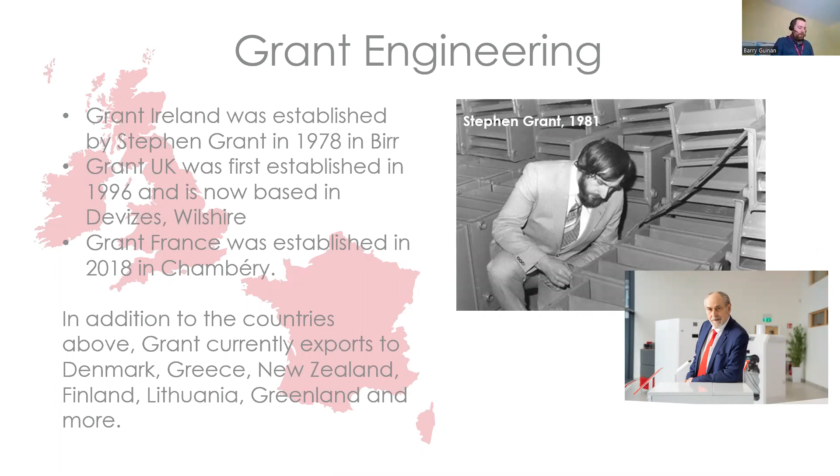Right, so basically, what is heat loss? In its simplest terms, heat loss is a measure of the total heat transfer through a building from internal to external via either conduction, convection, radiation, or a combination of them. Heat flows from hot areas to cold areas. This is derived from the second law of thermodynamics. So it will always flow from hot to cold.

Most homes will be maintained at around 20 degrees approximately. The average air temperature externally will be well below this. So this leads to a change in temperature, which means that you're going to have heat transfer from inside to outside. Heat transfer or heat loss will be measured in watts, or more commonly kilowatts, and in the older terminology, BTUs, which are British thermal units.

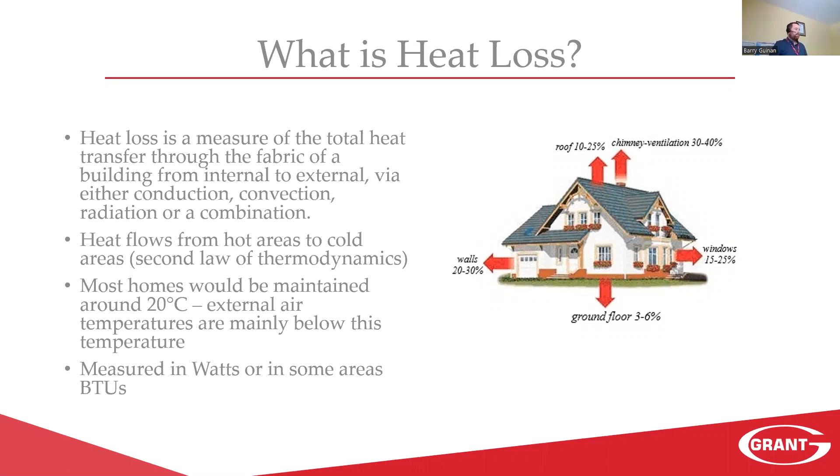So the first part of heat loss will be fabric heat loss. Fabric heat loss is the amount of heat loss through the physical elements of the building, such as the walls, ceiling, floors, windows, etc. To calculate fabric heat loss you need to know the internal design temperature. We need to know the external design temperature. We need to know the surface area of the specific element, so maybe the window, the wall, the floor, and then we also need to know the U value of the element.

When designing a building or a retrofit from a heating perspective, the element areas are generally set by the homeowner's requirements or by the existing building. So the wall is already built, the window ope is already built. The temperature difference between indoor and outdoor will be set by the climate. So the only real value that can be adjusted from a design perspective is the U value. So we can increase the insulation, or the quality of the window, etc. So from a fabric point of view, to minimize the heat loss, we must minimize the U value.

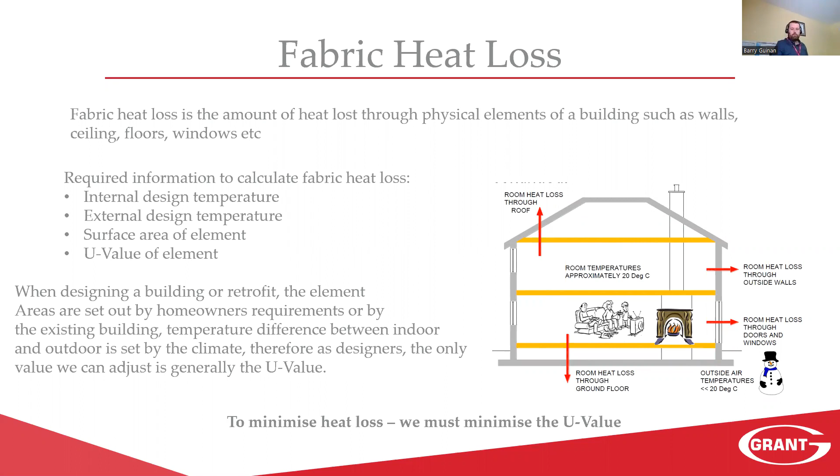To calculate the fabric heat loss, the simplified calculation can be given as Q = U A ΔT. So Q, the actual heat loss of that element, is the U value of the element times the surface area of that element times the temperature difference between indoor and outdoor. The overall heat loss of the building fabric would be the sum across all the different elements and the different temperature changes.

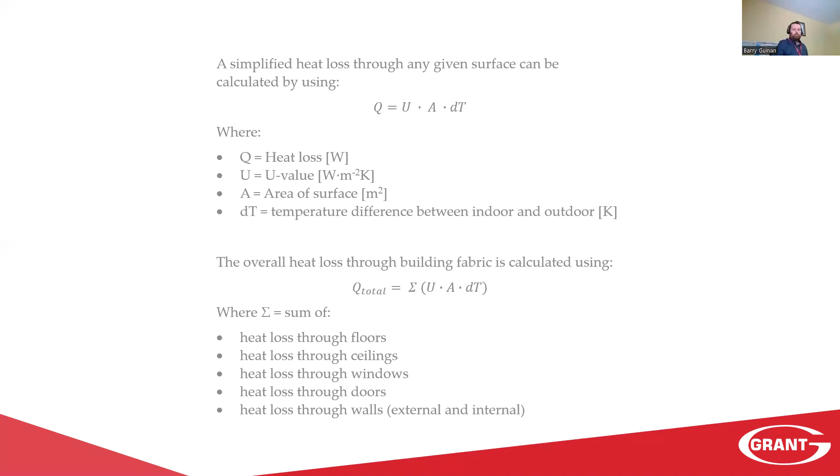The second part when calculating heat loss is ventilation heat loss. There's two primary causes of this: ventilation and infiltration. So the movement of the heated air within a space, transferring from inside to outside, lost to the surroundings, and then being replenished with cold air.

Ventilation is the deliberate process of replacing air in any space to provide high indoor air quality, whereas infiltration is the uncontrolled ingress and egress of air into any space through air leakage points. Air infiltration provides a significant amount of heat loss from a building. So in order to reduce this, we need to increase the level of air tightness.

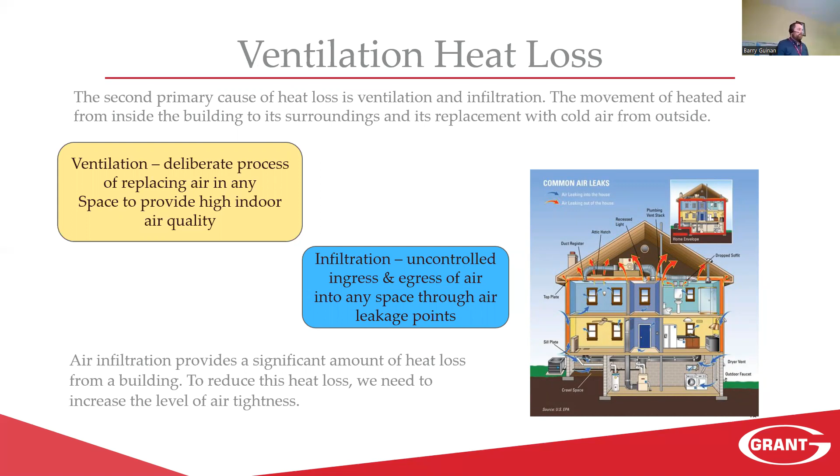The CIBSE Heating Design Guide and the standards we would use in Ireland, NSAI SR 50-1 and SR 50-4, which relate to plumbing and heating and heat pumps. So when we are designing heat loss calculations, there are a number of set criteria. These will be internal design temperatures for different rooms. So each room would have a specific target based on comfort levels, which are required to be reached.

They would also then have a specified air change rate. So this would be the volume of air that's required to be changed within that room over a certain period. So if you can see here, this is an example table from SR 50-1. It would have a list of different rooms. So, for argument's sake, a living room would have a design temperature of 21 degrees.

A new build would then need 0.5 air changes. Or if it was an older building, you would be looking at 1.5 air changes. So once we get to the calculations, we'll see the difference this makes. It can have a very significant difference. These, I suppose, are standard simplistic values. These can be adjusted once we factor in ventilation.

So if we had heat recovery ventilation, for argument's sake, the ventilation heat loss is possibly reduced because we can recover the heat that's been replenished back into the room. But for basic, simple terms, we're just going to keep it at these values. Secondly, if there are chimneys or flues or permanent vents within rooms, then the ventilation rates would obviously have to be increased to account for these.

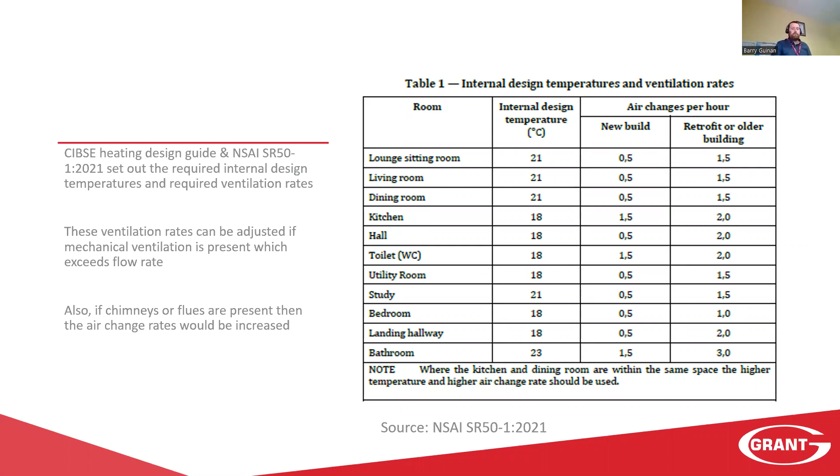So the ventilation heat loss calculation would be Q = 0.33 × V × N × ΔT. Q being the heat loss, 0.33 being a combination factor of the density of air and its specific heat capacity, V being the volume of the room, N being the number of specified air changes for that room, and ΔT being the temperature difference between indoor and outdoor.

So if we combine our previous calculation for fabric loss with our ventilation loss, the total heat loss is given by the sum of the elemental area times the U value, plus 0.33 by the volume by the air change, all by the temperature difference between indoor and outdoor.

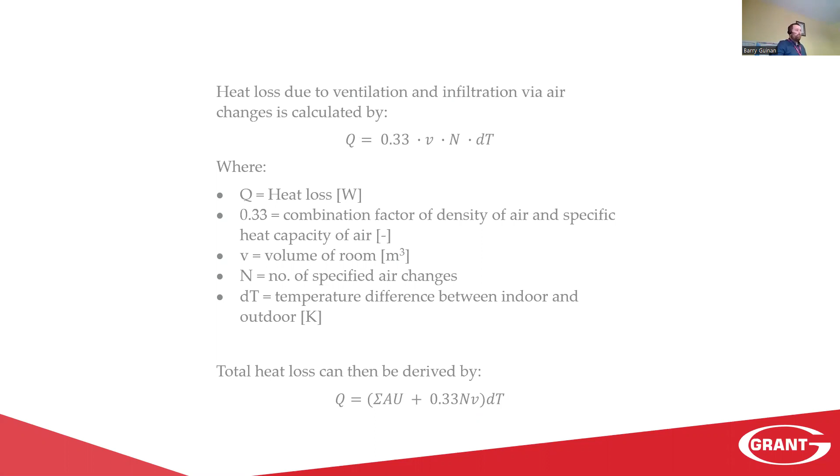So once we move on to a heat loss calculation, what we need to factor in is that if we're taking standard residential premises, each room has to be treated as separate. This is because each room has a specific set of design criteria. It would have its own design temperature and its own specific air rate. So we need to treat each room as specific, and then we can sum them at the end.

And I suppose the most important thing is that heat transfer will only take place when there is a change in temperature. So when we're doing internal calculations, if there is no change in temperature, for argument's sake, two bedrooms side by side both designed to 18 degrees, the internal wall between them will have no temperature change across it, so there'll be no heat transfer. This also occurs with intermediate floors and anywhere else with the same temperature on adjacent sides.

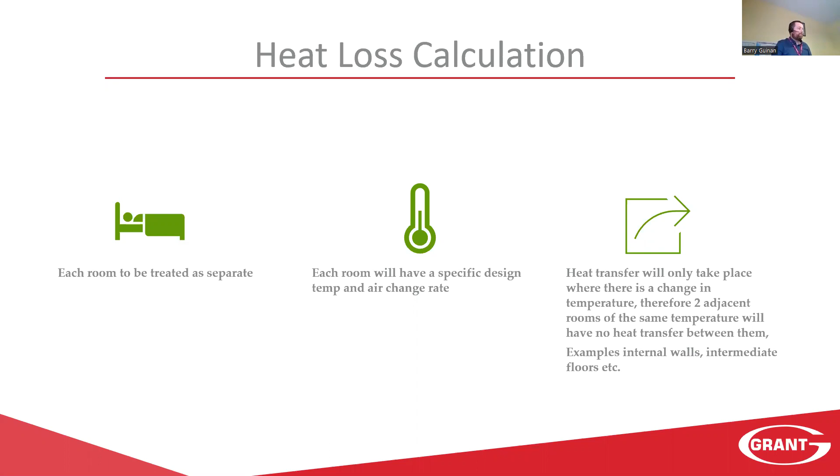So there are many different methods of doing heat loss calculations, different procedures and so on. This here is an example from SEAI's website. SEAI have a sample workbook on their website, which can be downloaded to aid people completing heat loss calculations. It's free to download for anyone, so it makes it easy starting off. You can see what's involved.

So factoring in what we've said about the different types, if we start at the top, you'd have your room specifics. This would be the actual type of room it is, whether it be a kitchen, a bedroom, a bathroom. Then it would have its corresponding design temperature and external design temperature.

In Ireland, we generally would take a design external temperature of -3 degrees. We can generally take this for the whole island. If you were doing heat loss calculations in the UK, up in say Scotland, you would possibly use -7, whereas down south of England, you might be using 0.1 or 0. So the external design temperature generally can change, but for Ireland, we would usually keep it at -3, so we keep it as a constant.

The next section then, if we look at the actual ventilation heat loss, you can see here we'd have the number of air changes per hour. This would have come from the table. So for our specific room, we need 1.5 air changes. Then the next part of that equation was the V, the volume. So we have the length by the width by the height, the volume of the room. So the amount of air to be heated in the room will be your air change multiplied by the volume of the room.

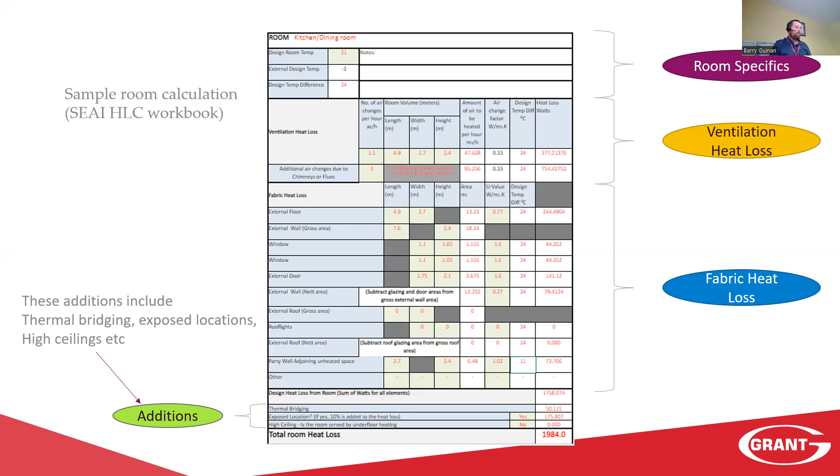So to summarize really on the heat loss side of things, to perform a heat loss calculation, the bare minimum that is required is we need to know all the room dimensions of the specific property. We need to know the window sizes, floor areas, ceiling heights, internal walls, external walls, we need to know all about the doors. So you need to know all the different elemental areas of the building.

We need to know the design room temperatures. So we need to know what the rooms are. If you had just a plan, but there was no way of identifying what the rooms are, you could have rooms designed at different temperatures that are incorrect. So like a bedroom being at 18 and a bathroom possibly 22. So you need to know exactly what the room is and what the design temperature is you're trying to get to.

We need to know the external design temperature, in Ireland being -3. We need to know the U values of all the different elements. And then we also need to know the air change rates. So once we have these bits of information, we should be able to perform a detailed heat loss calculation.

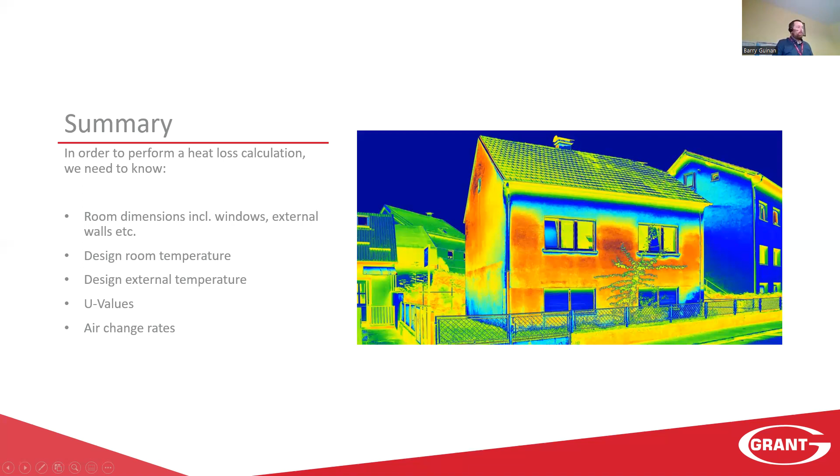Next, we'll just have a very quick overview of DEAP software. DEAP software, or Dwelling Energy Assessment Procedure, is used by BER assessors to calculate the energy performance and carbon dioxide emissions of a home's space heating, water heating, ventilation, lighting, etc. It is a web-based software, and is used to calculate annual delivered energy consumption, primary energy consumption, and the carbon dioxide emissions.

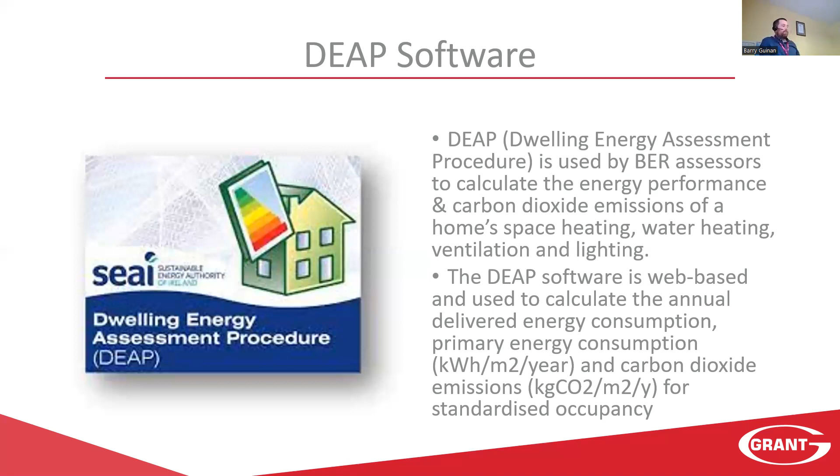Effectively, any BER assessment or technical assessment that's done on a residential basis will be done using this software package. Here are just some examples of what some of the screens look like, and what data goes in. It is a fairly significant process, so everything to do with a building will be inputted. So you would have all the elemental areas, window sizes, what orientation they're at. You would have everything to do with it.

So we see here, you'd input data for the floors, so number of floors, how many stories, are they heat loss floors, U values, exposed perimeters, etc. This would be the same for the roofs, walls, rooms, doors, etc. So basically everything from an elemental point of view of a specific building will go in.

You would also have all the ventilation details, so infiltration, your structural air tightness, ventilation methods, so is it natural ventilation, is there mechanical ventilation, heat recovery, etc. Number of sides sheltered. You would have the lighting, so how energy efficient is the lighting going into the building.

You would have the proposed or the existing heating system that's been installed, so is it a heat pump? What are the controls and responsiveness, pumps and fans? Basically everything to do with the mechanical side of the system. So from pumps to stats, to the amount of actuators, everything would go in.

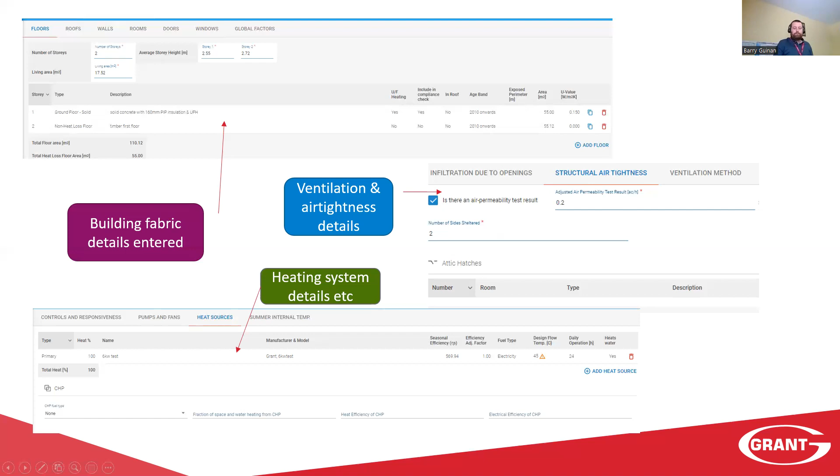So once all the different information is inputted and all the different tabs are filled out, you will get your results. It will tell you if all the different elements are compliant with the different targets, and what your energy rating is going to be. It would have all the different values and results from the building, from a carbon, from an energy, and possibly on a new build from a renewable basis.

For people on a retrofit scenario, if they're going for a heat pump grant, or if they are getting deep retrofits or shallow retrofits, they would need to know the HLI, so the heat loss indicator of the building. So this is the software that will produce that target. So we can see here, this example is 1.1, the target being 2 or 2.3 cost optimal. So you need to be below them. So this is what it'll tell you.

Also on a new build, it will tell you if you're compliant with building regulations. And then you would have your 3 targets, your energy target, your carbon target, and your renewable target. So the software will provide you with information to say, yes, the house is compliant, or no, it's not. If it is not, then you can go back and adjust certain parts to see what needs to be done.

If insulation in the wall needed to be upgraded from maybe 100 mil slab to 150 mil slab, or if the design flow temperature of a heat pump needed to be reduced from 45 to 40 if possible. So the software will tell you everything you need to know, and it will provide a pathway to get a house either compliant as a new build or, on a retrofit, how to achieve the targets and what measures can be adjusted in order to reach the targets.

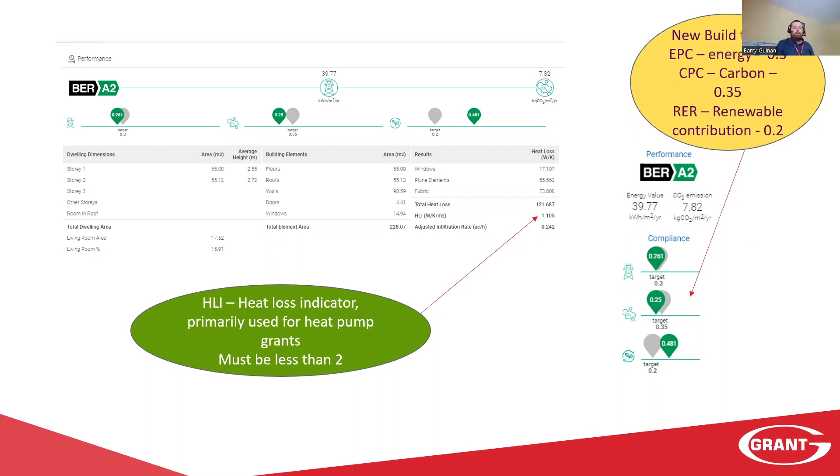I suppose that's really it for the overview of heat loss and DEAP software. There's a lot more to it, but without getting too technical with it, just to give you an overview, that was it.

For anyone that is interested in heat loss calculations or what goes into it, I would recommend the CIBSE Heating Design Guide. It gives step-by-step how to do a heat loss calculation, what's involved, what your figures are from design temperatures, from air changes, etc. And also SR50-1 and SR50-4. That will provide every bit of information needed in order to ensure that heat loss calculations are completed correctly.